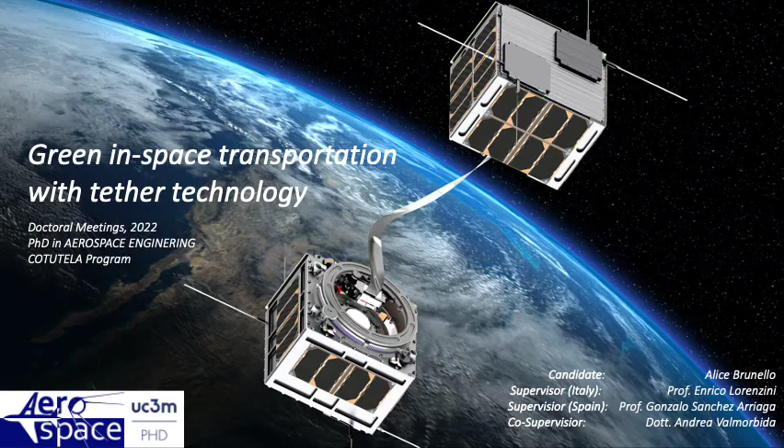Hello everybody, I'm Alice Brunello, a second year PhD student from Italy. I'm doing a co-tutela program under the supervision of both Professor Gonzalo Sanchez Arriaga from Spain and Professor Enrico Lorenzini from Italy. The title of my PhD thesis is Green In-Space Transportation with Tether Technology and regards the use of tethers for moving in space.

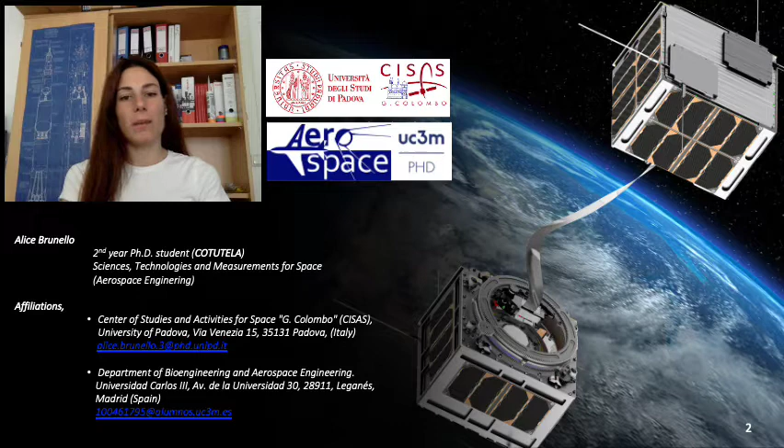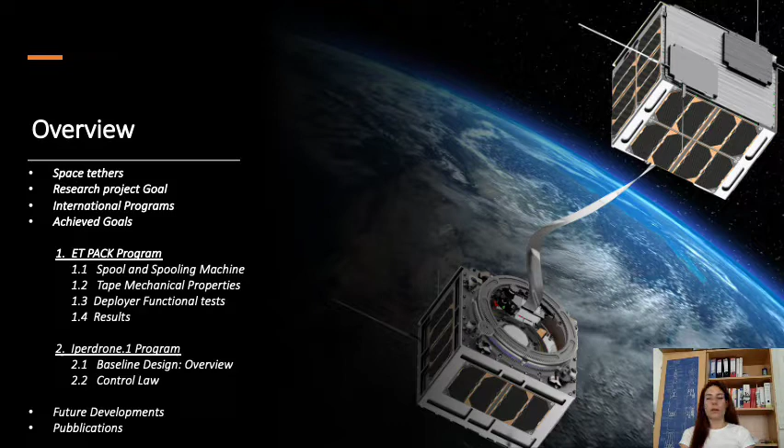In this presentation, I will offer you a description of tether systems, and I will talk about the research project I'm investigating with a focus on the main objectives. I will offer an overview of the international project I'm involved in, and I will talk about the most important achieved goals in the last year. I will describe the main results obtained both for the program ET PACK and Iperdrone, and at last I will show the future developments I schedule for the next year.

A tethered satellite is coupled by a long cable to another mass or spacecraft. Tethers can be inert or electrodynamic. Inert tethers are able to exchange angular momentum between objects in space, while electrodynamic tethers, interacting with the electrical and magnetic force field, produce green propulsion in space.

A space tether can be used for deorbiting end-of-life satellites, contributing to the mitigation of the growth of orbital debris, but can be used also for producing thrust forces in space, for example for reboosting LEO orbit satellites, or for re-entering payloads from low Earth orbits through the generation of delta V offered by the swing and release technique.

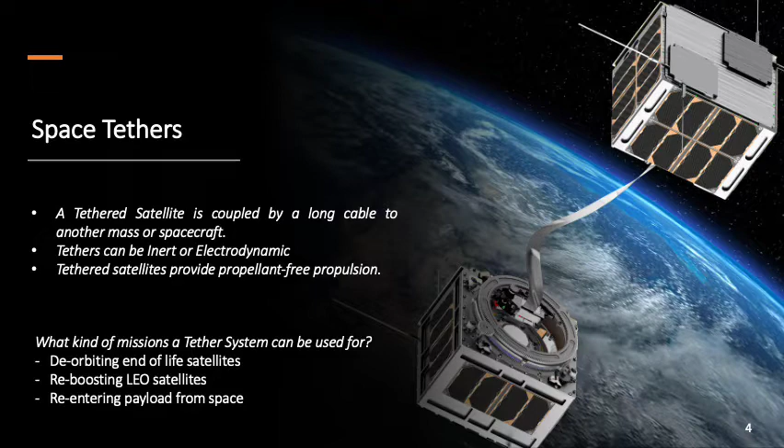In the last several years, the need for an alternative to chemical propulsive systems for LEO orbit satellites has become increasingly evident. A tether system can provide adequate thrust or drag without the complications of combustion and with a minimal impact on the space environment.

The research project is centered on demonstrating different configurations of tether systems to overcome the limitations of rocket propulsion, enable new classes of missions currently unaffordable or infeasible, significantly advance the tether technology towards an operational level, and establish a deeper understanding of critical processes and technologies for improving tether systems in the future.

The final goal will be to demonstrate the capability of the tether technology to provide a robust, safe, and propellant-less propulsion, both as a deorbiting and orbit-raising device, and fully characterize the performances of an integrated tether propulsion system.

The research project is related to three international programs. ET PACK, whose aim is to deorbit end-of-life satellites using electrodynamic tethers. Iperdrone.1, that proposes to re-enter a capsule from the International Space Station using inert tethers. Internet in Space, that proposes to develop a new technology based on the use of an electrodynamic tether system for reboosting low Earth orbit satellites, and thus for the compensation of the aerodynamic drag.

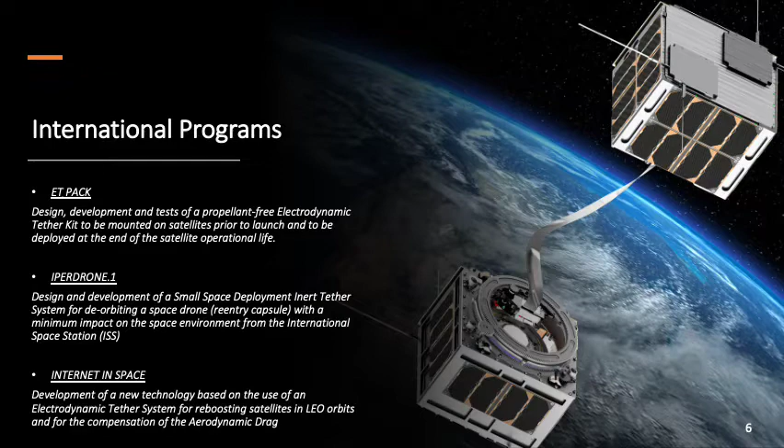Achieved goals during the last year are the following. For the first program, ET PACK, the design of the tape spool, the definition of tape mechanical properties and internal components, and the test of the deployer performances through the execution of functional tests. For the Iperdrone.1 program, the demonstration of the feasibility of moving away from the ISS using tethers, with particular attention to the hardware and software design.

The first part of the second year regarded the study of the spool design. The spool is a critical point for the mission success, and its definition in terms of tension and volume determines the deployment performances. Our trade-off analysis led to the selection of a stationary spool with 3 stacked coils and a parallel spooling. This means that the tape is rolled up around a fixed and central component and no moving parts are present.

Its dimensions were preliminarily investigated with the use of a MATLAB code, but further results were obtained with the use of the spooling machine. The spooling machine was used to create the tape spool in order to check its real dimensions and tension. The spooling machine is composed of 2 motors and a pulley mechanism and has the particularity to be able to translate along its longitudinal axis in order to pass from one coil to the next without any interruption. The machine is able to control the tether tension and computes accurately the spooled tape length.

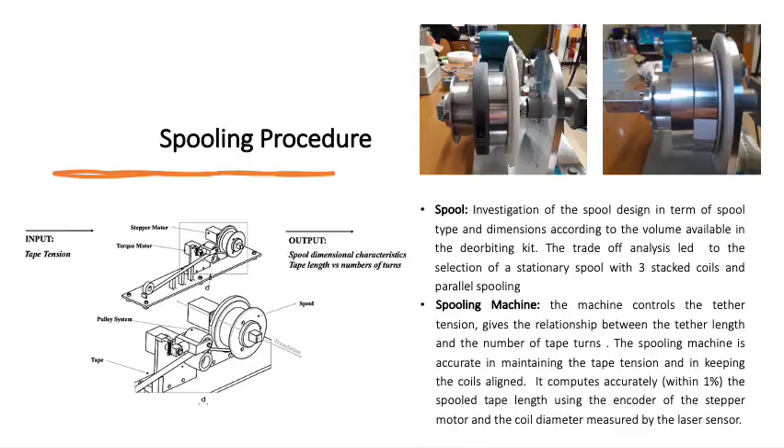During the first year, I investigated tape mechanical properties for 4 tape materials: Spectra, nylon, PEEK, and aluminium. The goal of my job was to characterize tether materials in order to find out valid solutions for future space tether missions. The determination of the elastic characteristics and damping coefficient were carried out through a campaign of experiments conducted with the laboratory facility SPARTANS of the University of Padua in Italy.

The stiffness and damping coefficient of a flexible line were verified by applying different tensile load profiles and then measuring the tether line dynamic response in terms of tension spike amplitude, oscillation decay, and estimation of the damping coefficient. The objective was to reconstruct and compare tests with simulations in order to determine tether mechanical properties.

During the second year, the attention was given to a PEEK sample, with a particular focus on the uncertainty analysis on the determination of the damping coefficient. The PEEK tape with the tip mass attached to the free end was modeled as a 1 degree of freedom second order underdamped system with a null initial velocity.

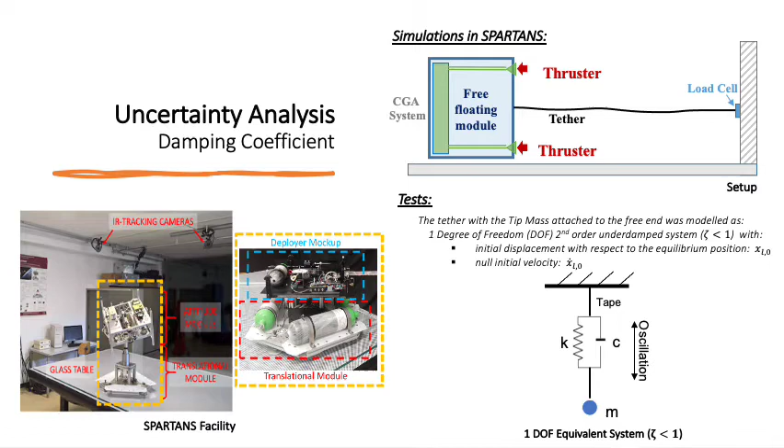3 methods of uncertainty analysis were investigated. Method 1: nonlinear regression on peak and valleys envelope. Method 2: logarithmic decrement. Method 3: linear regressions on peak and valley envelope. For each method, the uncertainty was computed using both the combined standard uncertainty and expanded uncertainty. The expanded uncertainty was computed using the t-student distribution with an error risk of 5%, due to the low number of tests that we have, just 9.

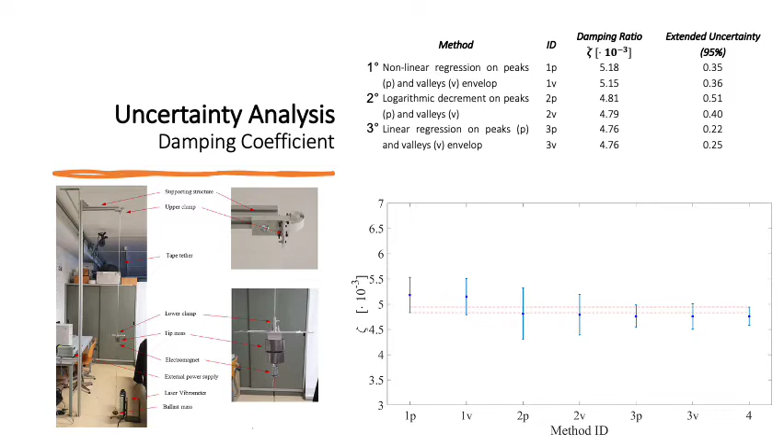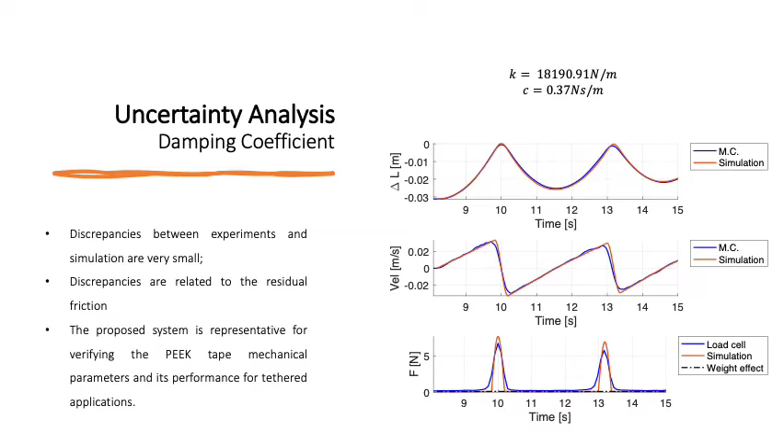Here in the picture you can see the results obtained. Taking a mean value from the parameter obtained with the experiment and its post-analysis, I reconstructed and compared tests with simulations in order to verify tether mechanical properties. As you can see, discrepancies between experimental data and simulations are very small and are for large part related to the residual friction between the test table and the module spacecraft unit.

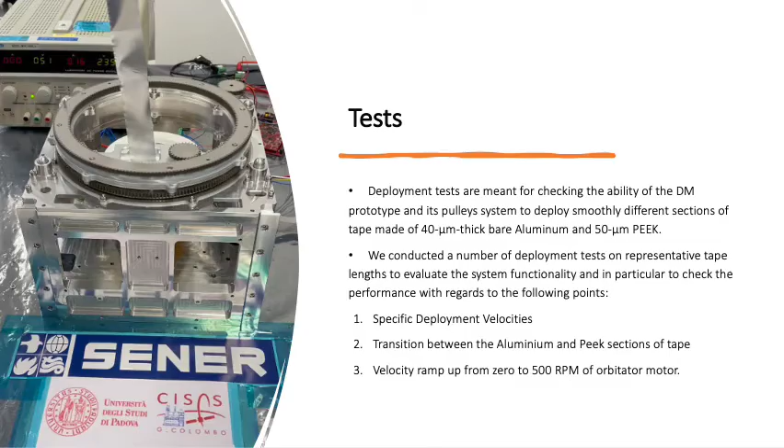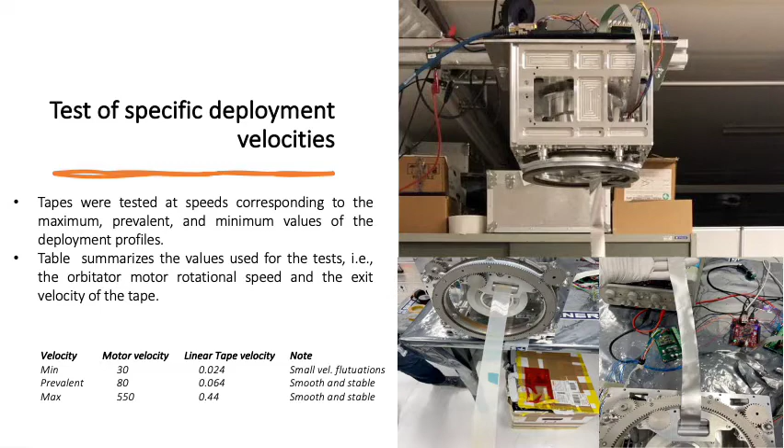Deployment tests were used to check the ability of the deployer mechanism to deploy smoothly different sections of tape. A number of deployment tests on representative tape length were performed to evaluate the system functionality and in particular to check the performances with regard to the following points: specific deployment velocities, transition between the aluminum and PEEK section of tape, velocity ramp up from 0 to 500 rpm of the orbitator motor. Tapes were tested at different speeds, and in particular from 30 rpm to 550 rpm. As we will see later, the deployment is always stable and smooth at every speed.

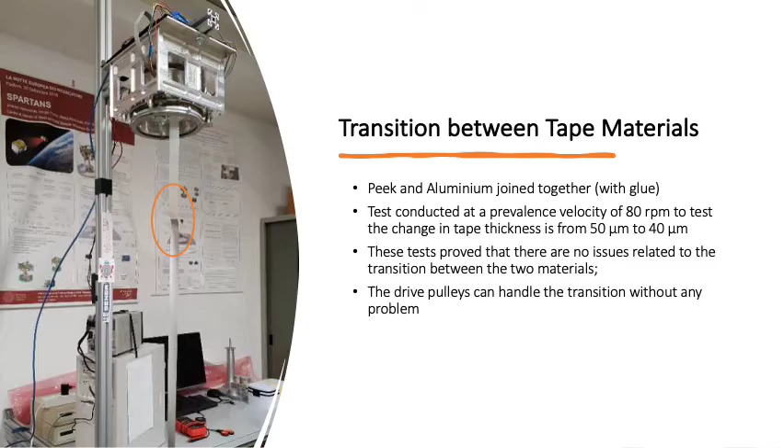Tests were also conducted for the transition between PEEK and aluminum tapes because they have different thickness. These tests proved that there are no issues related to the transition between the two materials, and the driving pulleys can handle the transition without any problem. The velocity ramp-up test was very important to test the initial phase of the deployment maneuver. The test was done from 0 up to a rotational velocity of 500 rpm, and no issues occurred during the acceleration.

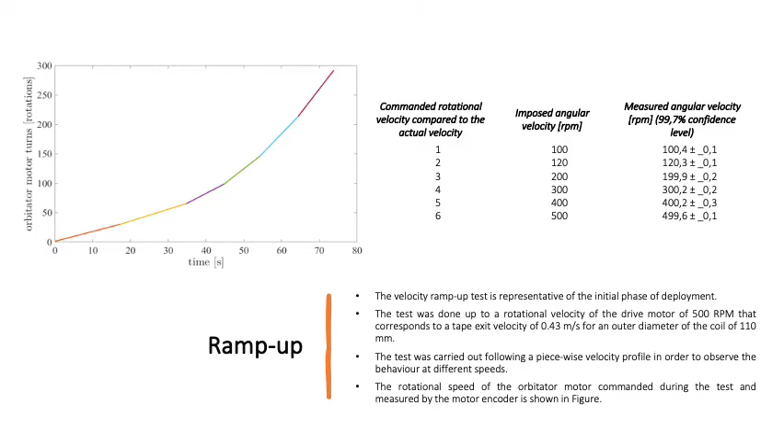This slide shows an example of the tape deployment. A dedicated experiment setup was built to suspend the deployer upside down for deploying long tape samples. The upside-down configuration is actually unfavorable for deploying a multi-coil spool because gravity tends to make the outer turn of the coils, not supported by any flange, fall down. But from the operational point of view, the upside-down deployment has the advantage that the collection of the long tape takes place naturally without needing any intervention. Note that if the system works in this configuration, it will work better in weightless conditions. This test was performed for the prevalent velocity of 80 rpm and, as you can see, the deployment is smooth and stable.

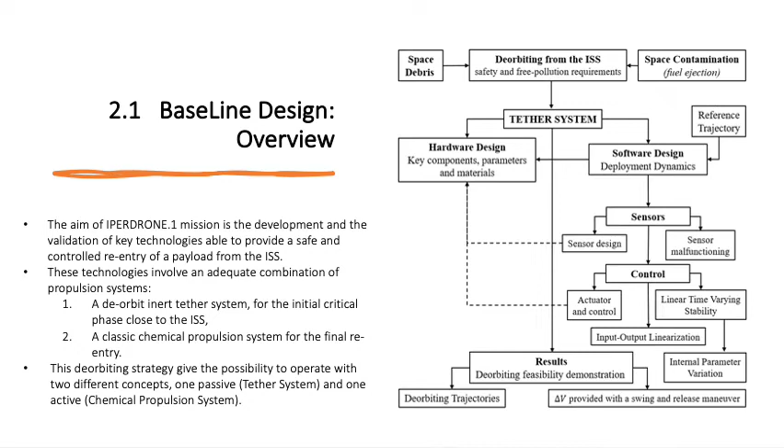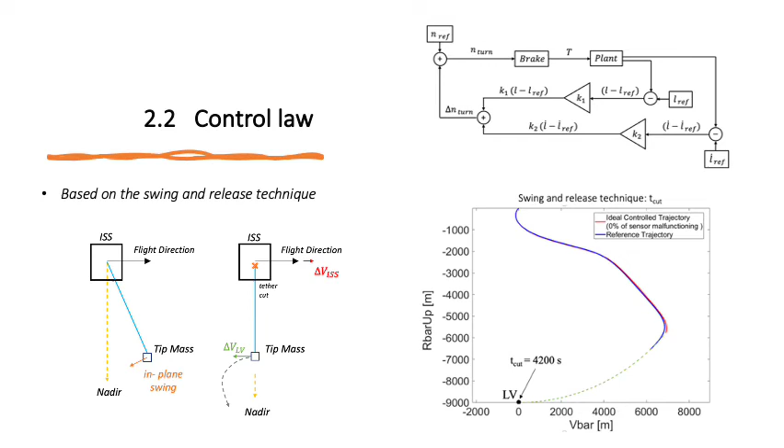As a conclusion, all the pre-established tasks were well achieved, and I can say that I'm perfectly on time with respect to the schedule. What is missing, but this will be investigated during the last PhD year, is to take care of the Internet in Space program for the compensation of the aerodynamic drag using tethers. The next year, I will develop a control strategy for navigation and guidance of satellites maintained in orbit by an electrodynamic tether system, and I will try to arrive at a solution that is mass efficient and that can generate the desired thrust forces.